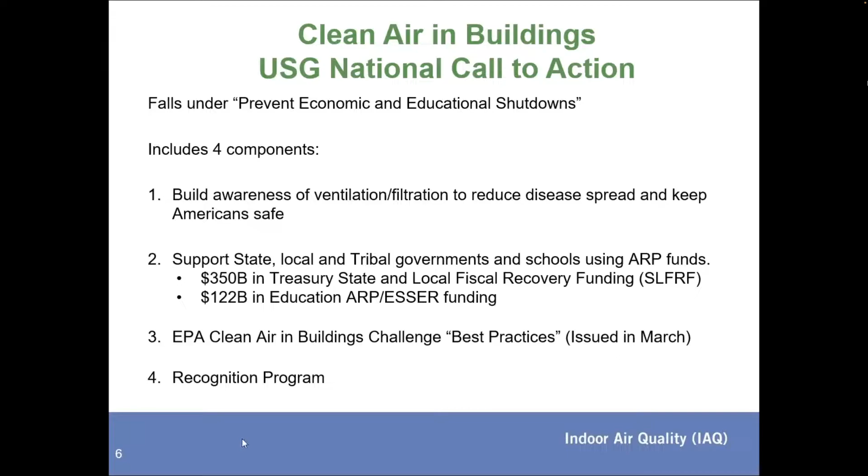At this time, I'd like to introduce Dr. Bill Bahnfleth, or William. He is a professor of architectural engineering at the Pennsylvania State University in University Park, Pennsylvania. He is a fellow of ASHRAE, the American Society of Mechanical Engineers, and the International Society of Indoor Air Quality and Climate. As the chair of the ASHRAE Epidemic Task Force, he has been recognized with a letter of appreciation from the U.S. EPA and the ASHRAE Presidential Certificate of Honor. At this time, I want to hand it over to Bill, who is going to tell us about ASHRAE IAQ standards before, during, and after COVID.

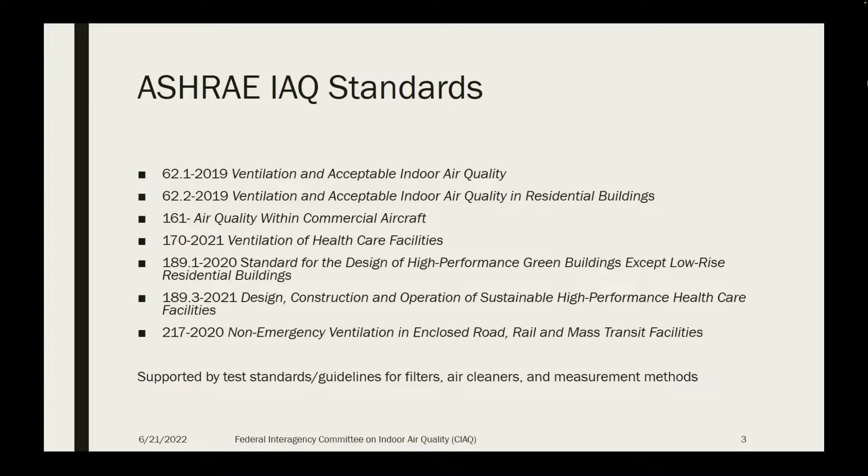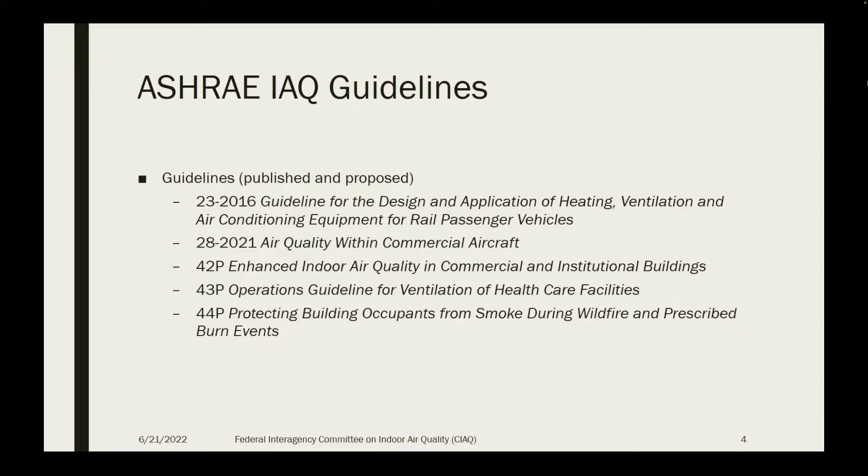One on enhanced indoor air quality that I think is almost ready to go. Another one for healthcare facility ventilation, and a third on protecting building occupants from wildfire smoke. So there's a large body of standard and guideline information put together by ASHRAE's committees that can be accessed to address our common goals here. It is the best example and the most important example of these.

I'd like to go through what's in ASHRAE Standard 62.1, Ventilation and Acceptable Indoor Air Quality. It used to be Ventilation for Acceptable Indoor Air Quality, but the name was tweaked fairly recently. I think you'll agree when you get to the end of my summary that there's really a lot here that is exactly what we need to move forward, but I'll point out that one of the big issues we have is how much of what's in a standard actually gets into the building code and becomes mandatory for someone who's designing or operating a building. So we'll come back to that point a little bit later.

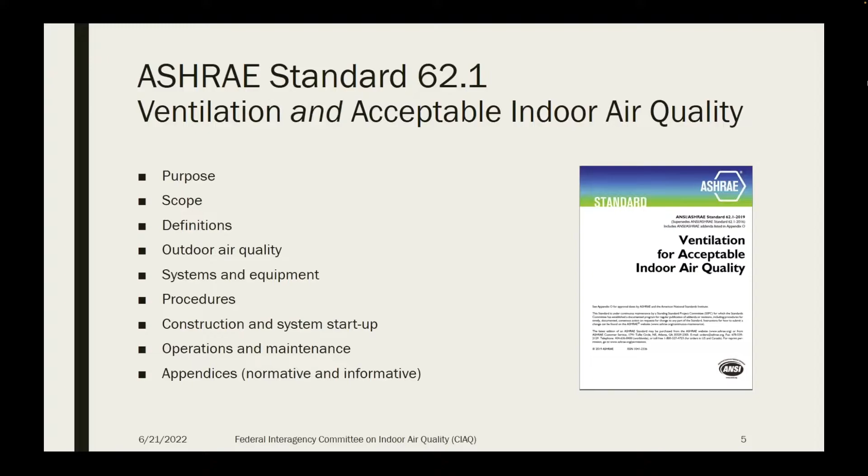You can see the main sections of 62.1 listed there on the left, purpose, scope, definitions, and others that we'll go through. And I'll touch on all of these things except for the appendices. So the purpose of the standard is to specify ventilation rates and other measures that will give us air quality that's acceptable to occupants and that will minimize adverse health effects. I'm going to pick on this point of minimizing adverse health effects as falling short of actually promoting health, and that's one of the areas that I think we can improve on.

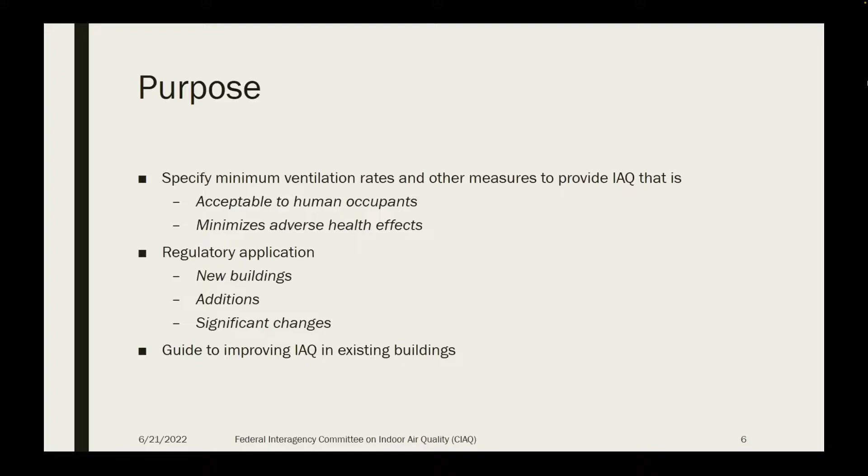It's intended for regulatory application, primarily to new buildings, but also to additions to buildings that are large enough to require it, and also if there are significant changes in the operation of the building. It should be applied to existing buildings. And it also is intended to be a guide to improving indoor air quality in existing buildings, even if it's not mandatory.

The scope is occupied spaces in buildings except non-transient occupancy dwelling units. In other words, residential buildings that are covered by Standard 62.2. And it covers comprehensively ventilation and air cleaning system design, installation, commissioning, operation, and maintenance.

And there are also requirements that we'll see for some contaminants, a limited number of contaminants and their sources, including outdoor air, construction, and others. But one thing that's not covered in the standard is pathogens. What's excluded from the scope is smoking, which was removed a long time ago because it was concluded that we couldn't specify ventilation quantities for smoking that met the requirements of the purpose of the standard.

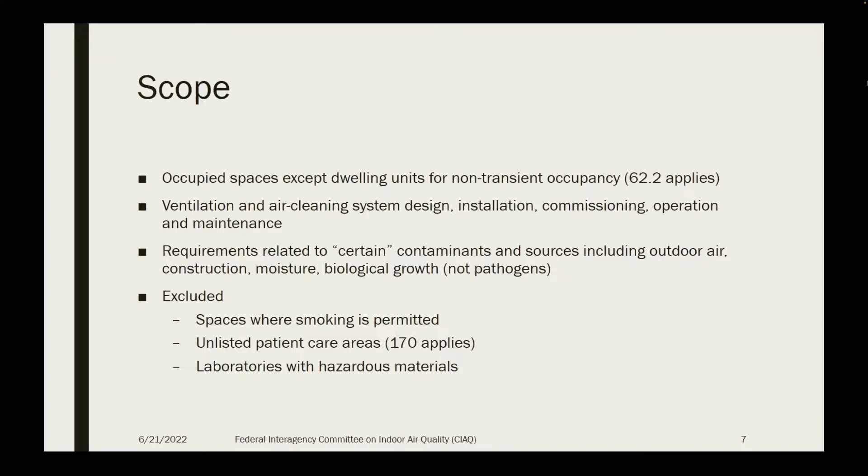It also doesn't apply to any patient care areas that aren't listed. Those fall under ASHRAE Standard 170 for healthcare, and likewise laboratories with hazardous materials. But it does cover really the majority of non-residential buildings and spaces in those buildings.

From the definitions, I only want to pull out one thing, and that is this critical definition of acceptable indoor air quality, which ties back to the stated purpose. No known contaminants at harmful concentrations as determined by cognizant authorities, and a substantial majority of the people exposed do not express dissatisfaction. So I call this a safety and satisfaction criterion because from the health point of view, it only strives to prevent adverse health effects. It doesn't promote what we would call today health and well-being.

And you may be familiar with the World Health Organization's definition of health, which starts out with the statement that it's not merely the absence of disease. So we have a standard that tries to avoid those adverse health effects and to ventilate at levels that don't cause occupant dissatisfaction. And you may have seen the data on the right, which has been the basis of these standards around the world for a long time, done by Fanger and others on human subjects that can relate the amount of ventilation per sedentary individual to the likely percent dissatisfied.

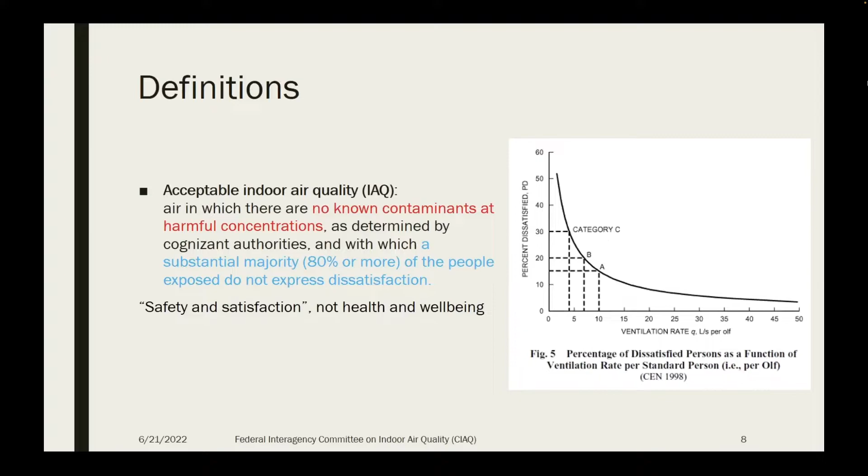So the next section of the standard deals with outdoor air quality. The ventilation standard must presume or specify how we can have outdoor air that's of acceptable quality to remove indoor contaminants. If we have outdoor air that's dirtier than the indoor air, then we may actually be making things worse by using it. So these are requirements for the outdoor air, and they fall into two categories.

The first is regional air quality. So the user of the standard should determine whether regionally the outdoor air is in compliance with the national standards. In the U.S., that would be the National Ambient Air Quality Standards. And if there's non-attainment in some respect, then that can trigger special requirements. And in Standard 62, those relate to particulate matter and ozone.

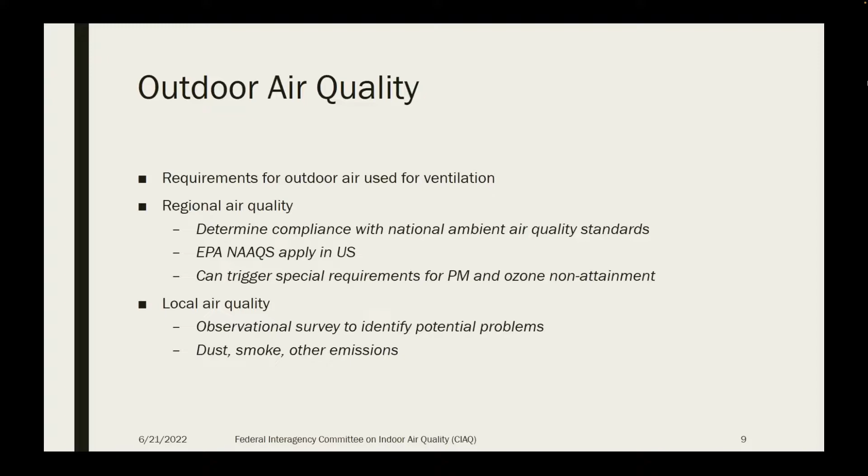And also, the standard says that there should be a local air quality survey, so an observational survey where the building is located to identify potential problems, for example, sources of dust, smoke, or other emissions, which often happens in urban or even in rural agricultural areas.

The next section deals with systems and equipment and the design of systems, and I will not go through all of the things I've pulled out and put on this slide, but I think it's important to note that there is a lot in Standard 62.1 about how you put together a system that is going to be able to deliver good air quality consistently, and this includes things like having a system that can be maintained and balanced, and taking care about where exhausts and outdoor air intakes are located.

With respect to air cleaners, we're now starting to see requirements in the standard, like the one shown here, that air cleaners must be compliant with UL 2998, which essentially means that they produce no ozone. And a related requirement, UV devices can emit no 185 nanometer UVC, which is a wavelength that produces ozone. And there are others as well that I would direct you to the standard to read in detail. This is the sort of thing that doesn't make it into the codes, as we'll note again later.

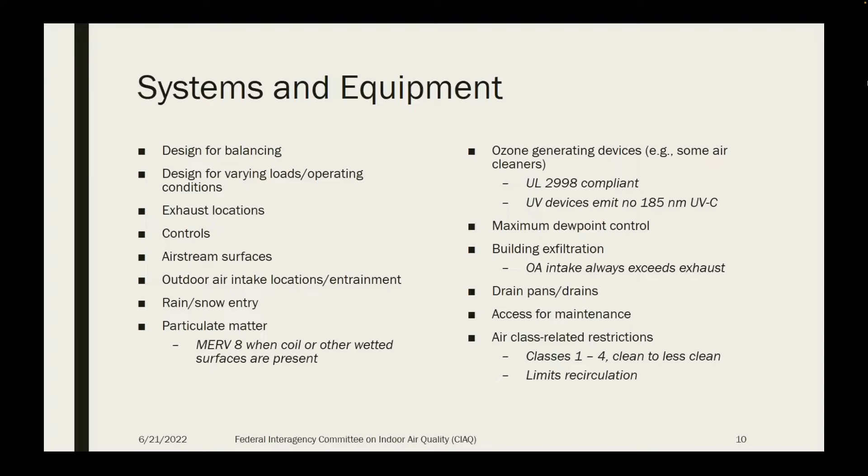Now, the part of the standard that most are familiar with, and it's probably the only part of the standard that many designers are well aware of, is the procedures section. These are the compliance paths by which we determine how much outdoor air has to be brought in to achieve the goals of the standard.

The first procedure is the ventilation rate procedure, or VRP. It's a prescriptive procedure in which outdoor airflow rates are specified based on the space type, on the floor area of the space, and on the number of occupants.

So if a designer has applied this procedure correctly and determined the total outdoor airflow that needs to be brought in, then they've complied prescriptively.

The second procedure is the indoor air quality procedure, which relates to control of specific contaminants to required levels. This part of the standard has just been completely upgraded in a way that I think is very good and an important improvement. In the past, it was left to the user to identify the contaminants of concern and to do mass balance calculations to determine how much outdoor air was needed for control, and they could also apply air cleaners, but there was no requirement for verification of that.

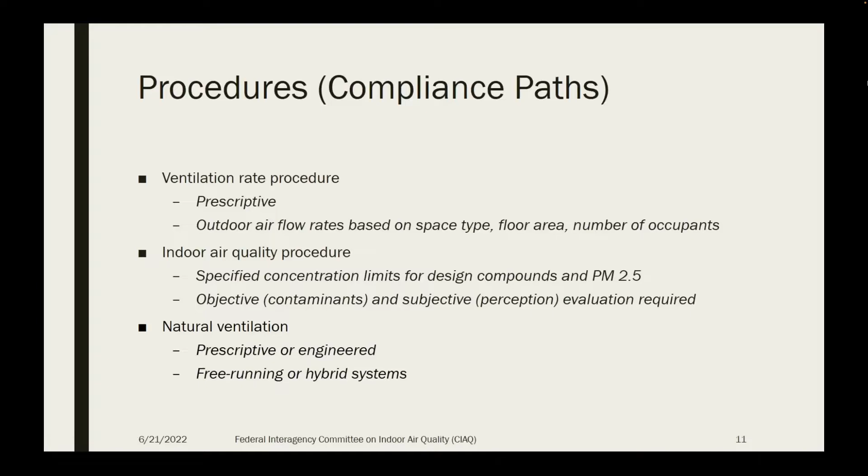So the ventilation rate procedure begins by defining the required breathing zone outdoor airflow. So this is outdoor air that's brought into the part of a space where occupants are and where they will be able to actually benefit from it. The breathing zone is defined as 3 to 72 inches above the floor and more than 2 feet from the walls.

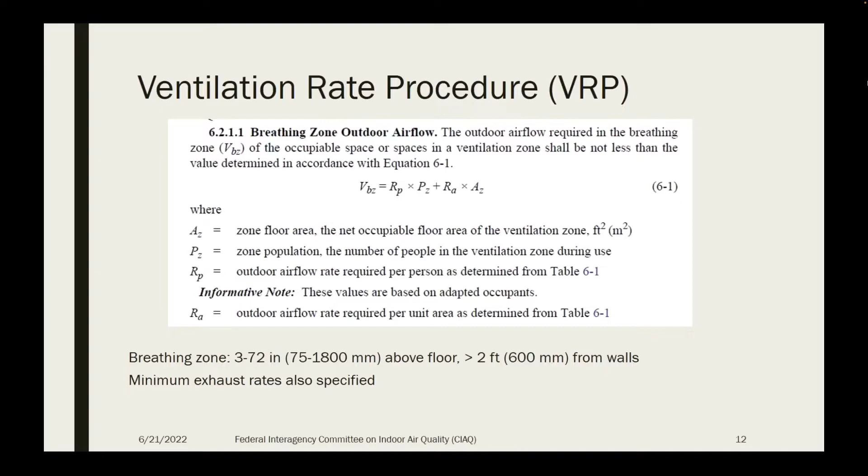And as you can see by the equation here, the breathing zone ventilation rate is the sum of two parts. One is a rate per person multiplied by the number of occupants, and the other is a rate per unit of floor area multiplied by the area. And so those two together become the design minimum breathing zone ventilation rate.

This is an excerpt from the table where the various rates are found. It goes on for several pages, so I just grabbed a little piece of it that shows office buildings. You can see there, hopefully, the office space, for example, has a requirement of 5 CFM per person plus 0.06 CFM per square foot.

The population of a zone can be determined by the designer if there's a chair count or if the architect has given them a number, but in the absence of that, default occupant densities have been provided that can be used to give us typical values. I think with the default occupant density for office space, we wind up with something like 17 CFM per person, but I think it's important to point out here that there is no consistent CFM per person or CFM per square foot across all space types, and that becomes important when we get into discussions like we've had during the pandemic of what should the CO2 concentration be in a space.

To comply with Standard 62, it may be necessary in some cases to have a CO2 concentration that's well under 1,000 parts per million, but there are space types with high occupant densities that may have CO2 concentrations that are around 2,000 parts per million when complying with the standard. So this has been an interesting issue to negotiate in discussing what we should do with ventilation for infection control.

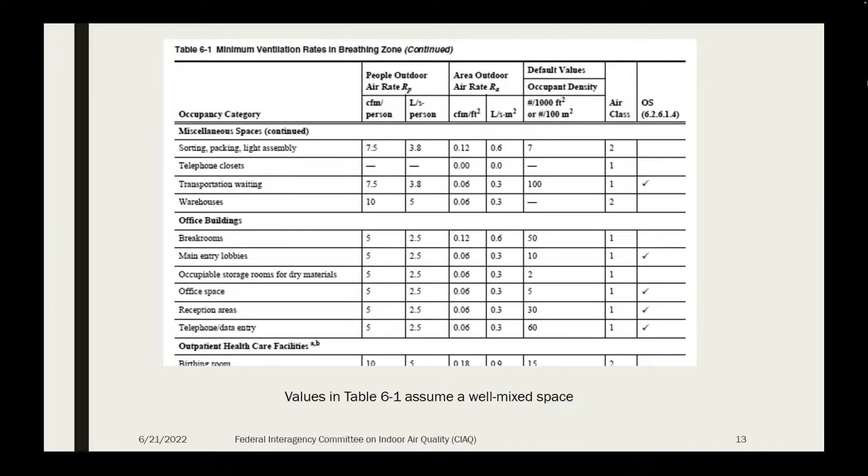Now, to this breathing zone ventilation quantity, we need to make some corrections. It's assumed that the outdoor air that's brought into the breathing zone is thoroughly mixed, some would say well mixed, in that space, so that contaminant concentrations are all averaged out.

And also we can provide outdoor air directly to where an occupant is, personal ventilation. So we need to make corrections for the type of air distribution and also for how well it's performing.

And in addition to that, when we take multiple spaces and connect them together in a system, so we have 10, 20, 100 rooms on an air distribution system, we now have recirculation of air that was in one space that goes back to the others. And so we have differences in the amount of outdoor air required depending on whether we have or don't have recirculation. And I won't go through the details of that in this talk.

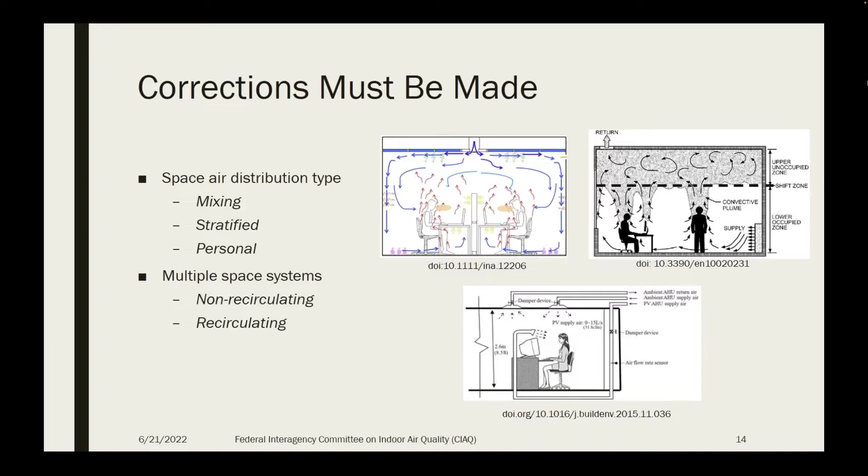The ventilation rate procedure also discusses dynamic or demand control ventilation. Demand control has generally been used for the purpose of saving energy. The reason that we do demand control in most cases is to reduce the amount of outdoor air so that we stay at the level of ventilation that's required by the standard and no more. And that is an interesting thing to realize, because it means that whatever our minimum standard is, we're making sure we never do any better than that if we can avoid it.

So we can reset the outdoor air based on the current occupancy, and in some cases it can actually be shut off when a space is unoccupied and then restarted. The standard is not explicit in saying how demand control can be done, although it does imply that carbon dioxide measurements are acceptable, but it also mentions some criteria that need to be met. I think we can do demand control differently, and we'll come back to that at the end.

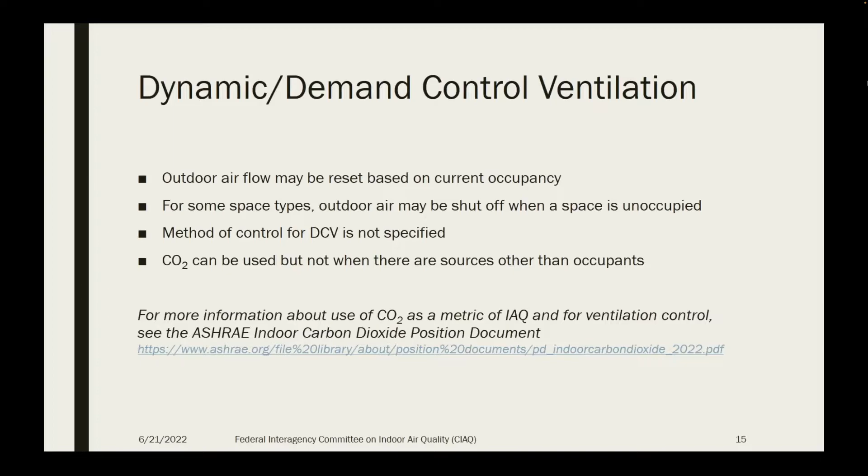ASHRAE has just published within the last few months a position document on indoor carbon dioxide, and it addresses issues of the uses of CO2 in ventilation and for infection risk management, and I would encourage you to take a look at that. If you haven't seen it, it can be downloaded from the ASHRAE website.

So these corrections that we're talking about are in the standard given in the form of zone air distribution effectiveness corrections, and we divide the breathing zone outdoor air rate by the air distribution effectiveness. So if the value of Ez is less than 1, that means that we have to exceed the amount of outdoor air that was given in the original table 6.1 that we looked at. And if it's a larger value, that means you've got better than well-mixed ventilation effectiveness, and we can reduce it.

And the 3 categories of air distribution that we talked about, mixing, stratified, and personalized, are now all covered here. And you notice there's quite a range in these Ez coefficients. 1.0 would be perfect mixing, but for mixing systems, if they're performing poorly, if they stratify for some reason, or if we have short circuiting, then Ez could be as small as 0.5. And for a well-performing stratified or personalized ventilation system, the value of Ez could be as large as 1.5. So that further changes the picture as far as how much outdoor air we really need.

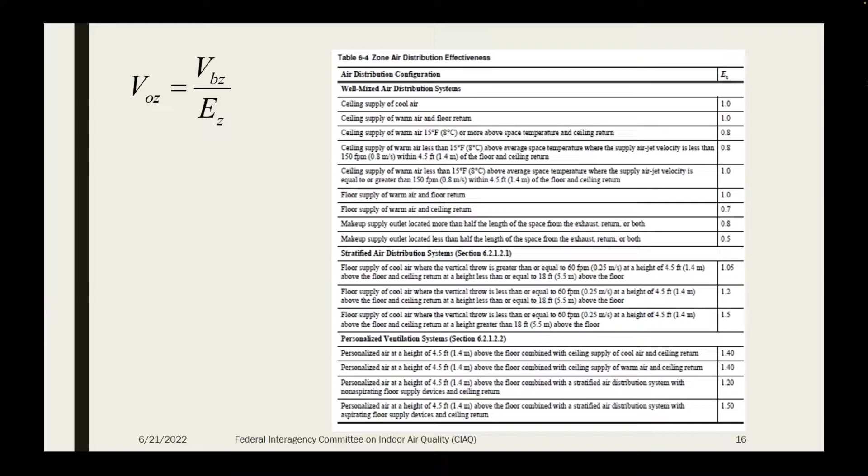And this really kind of encapsulates a very important issue, which is how well air is distributed in spaces, and that's something that lies outside the standard, but it's an important topic for the future to try to achieve good air distribution. We've seen that to be a problem in many cases during the pandemic.

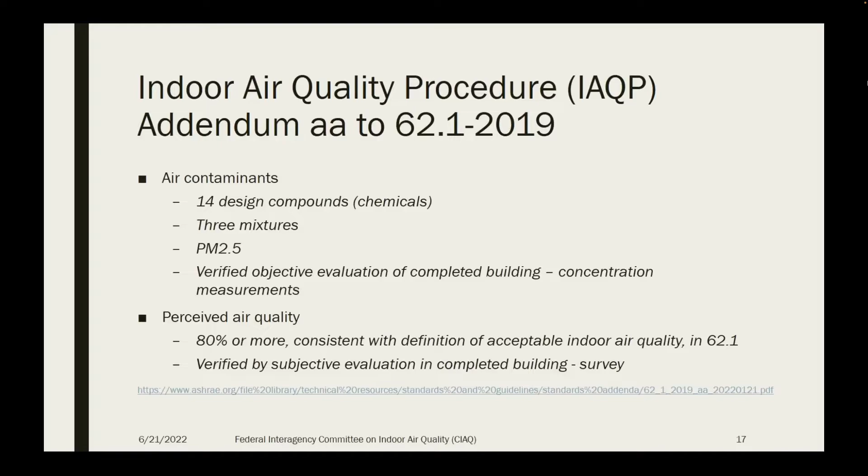So I mentioned the indoor air quality procedure before, and now we'll look at it in a little detail. There are 14 design compounds and 3 mixtures of those compounds, and also PM2.5 that are listed. And as I mentioned, we need to have objective evaluation that those requirements are met. For perceived air quality, 80% or more of the occupants by survey need to be determined to be not dissatisfied with air quality. You can get the addendum from the ASHRAE website at the URL shown here. Hopefully my slides can be made available to folks afterwards.

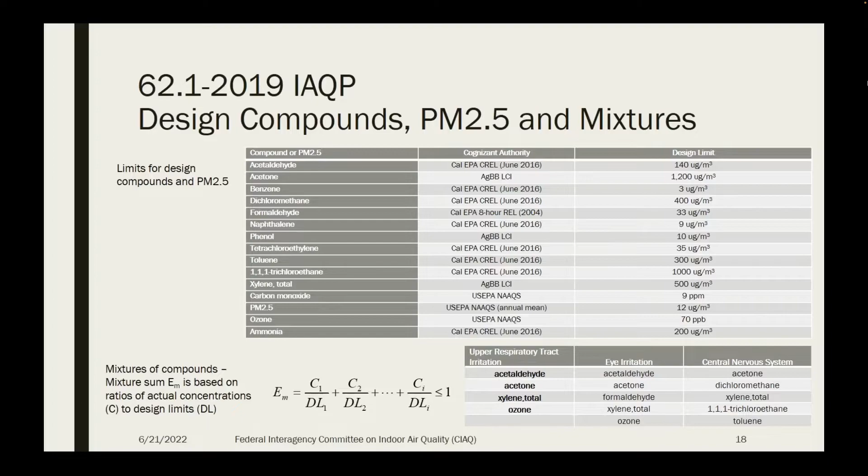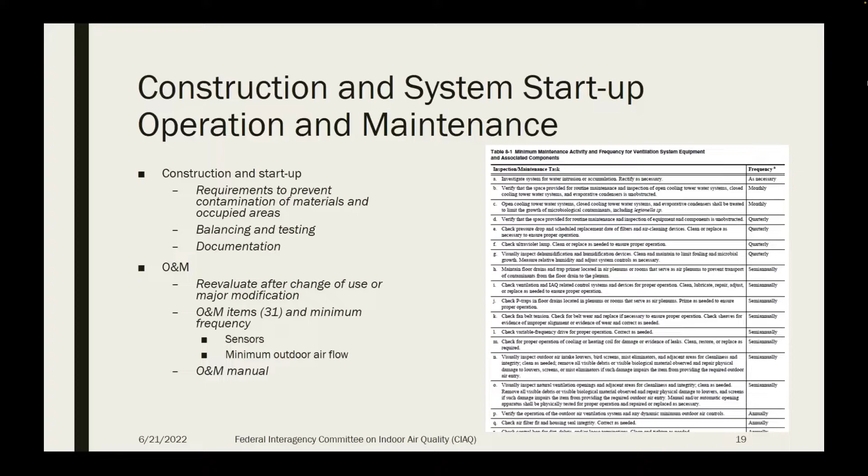Many of us had learned during the pandemic, when surveys were done of portfolios of buildings, that many of them were not meeting their minimum requirements, and in fact, many of them were found not to be able to meet them. So this is a really important part of the standard. And O&M documentation is also mentioned here. So that's what I want to summarize at a high level, what's in 62.1.

Now to wrap this part up, a few thoughts about the relationship of standard 62.1 to the building codes. I think many believe that standard 62.1 is the building code, but actually standards are mandatory only to the extent that they make it into the code, and that's a different step, and it can be a pretty fine filter for what's in a standard. So few standards are adopted in their entirety as building codes, and in some cases only a little bit makes it there. The International Code Council is certainly the predominant writer of model codes in the U.S.

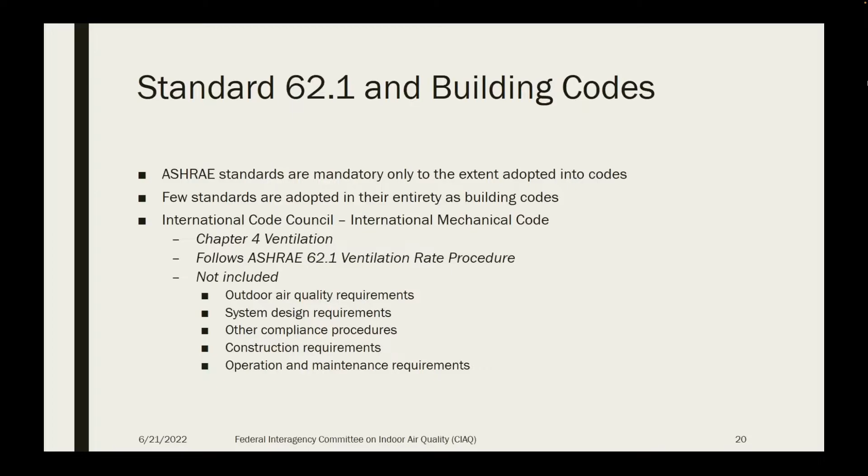And the International Mechanical Code covers in chapter 4 ventilation, and that section follows the ventilation rate procedure from whatever version of 62.1 was in force when the particular version of the model code was updated. So it doesn't really cover the outdoor air quality requirements, the system design requirements, the other compliance procedures like the IAQP, the construction requirements, or the O&M requirements that we just looked at. So it sets aside a lot of things that would be really important for designing the building well, and also for maintaining and operating it effectively over its lifetime.

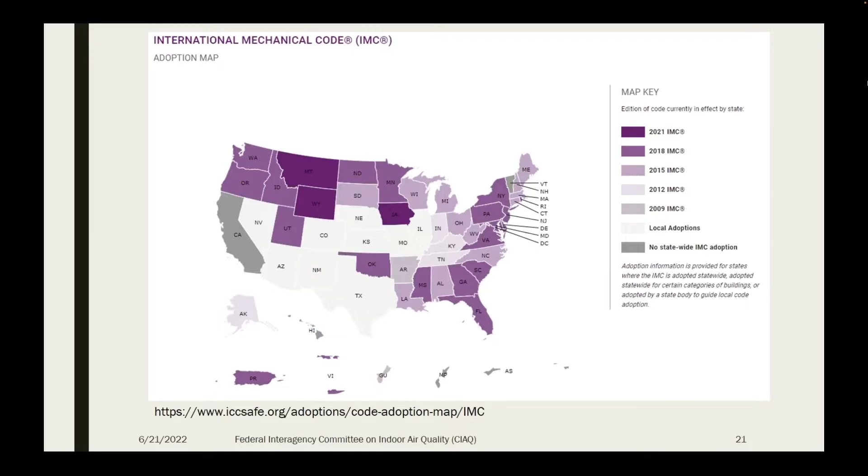This map that comes from the ICC website shows the coverage of the U.S. by the International Mechanical Code, and somewhat like the coverage with energy standards and their compliance with ASHRAE Standard 90.1, we see that we've got versions of the IMC all the way from 2009 through 2021 that are adopted in different states. So this is an important thing to look at, is how do we get the good things that are in some of the most important standards into the code so that they'll actually be used.

So now we'll move on to what ASHRAE has done during the pandemic, and it certainly has been a big job and a very rewarding job for me to work with so many subject matter experts to put together what the Epidemic Task Force has done.

I'm going to summarize all of that by going through a one-page list of recommendations that we call the core recommendations that were published early in 2021. The reason that we did that was that we wanted to have a concise list of our main principles that we could use to keep everyone on this big task force coordinated, and also to make it clear to the public and the users of the guidance what ASHRAE was recommending at a current particular point in time, and communicate the basics of airborne risk reduction.

It really has been a big problem over the 2 years of the pandemic to make it clear in an ongoing way what ASHRAE has recommended. I think everyone, not just ASHRAE, early on was very conservative and proposed just about anything that seemed like it might help. But after only a few months, we were making significant revisions to the initial guidance based on considerations of technical feasibility and energy use and operating costs, and also reevaluating how much benefit there might be from some of the things that were recommended.

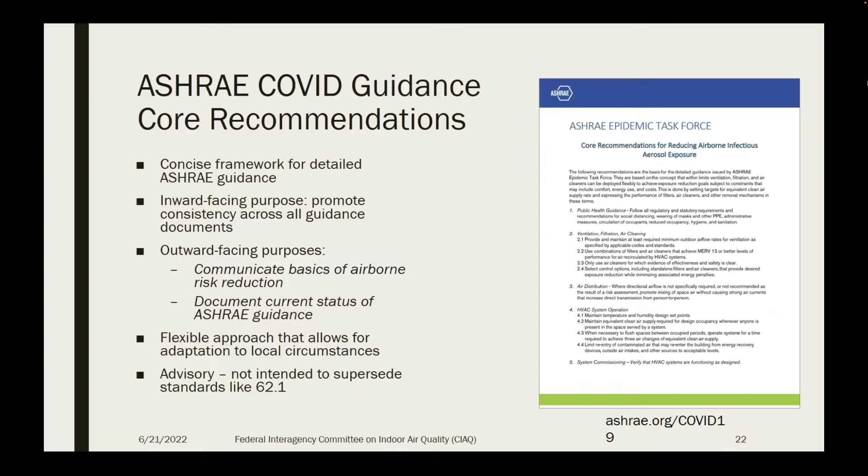And what I think we came to eventually, and this is really the current state of the guidance, is recommendations that support a flexible approach to risk mitigation that can be adapted to just about any building and situation. And again, these are advisory. They don't supersede standards like 62.1, and we had to give a lot of assurances to the standards folks that we were not writing new regulations that everyone would have to follow after the pandemic, although we hope that what we have done will certainly inform what's done in the future.

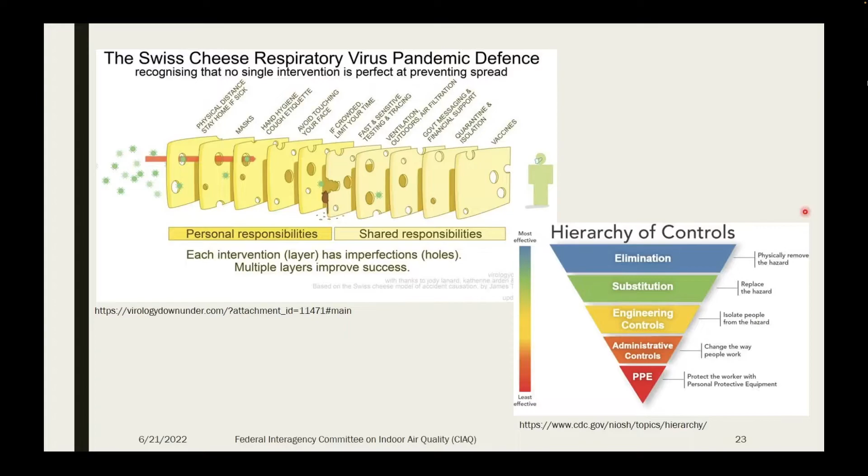So the first thing that I want to highlight here is the notion that what we can do with building systems, with building science solutions, is just one slice in the stack of slices of Swiss cheese, if you prefer that model of risk management. And it's just one layer in the hierarchy of controls that you may have been more familiar with previously from NIOSH, and not the most effective layer. Elimination, substitution are clearly always the best way to deal with a hazard.

So we start the recommendations by saying follow public health guidance. And of course, that can be difficult as it goes back and forth under the influence of various forces, but by and large, public health guidance has been on target in terms of things that we should do. And so we encourage that those measures, like using masks when recommended, social distancing when recommended, being vaccinated when vaccines are available, are really the first line of defense, and will be complemented and supplemented by what we can do in buildings.

So the meat of the recommendations is probably the ventilation, filtration, and air cleaning section. We start with outdoor air. The recommendation at this point is to provide and maintain at least the required minimum outdoor airflow rates per code and standard. The reason that's important is that early on there were a lot of sources recommending maximizing outdoor air. Whatever your system can provide, if you can go into full economizer mode, then do it, and that's going to be better. We don't think that that's really the right approach anymore.

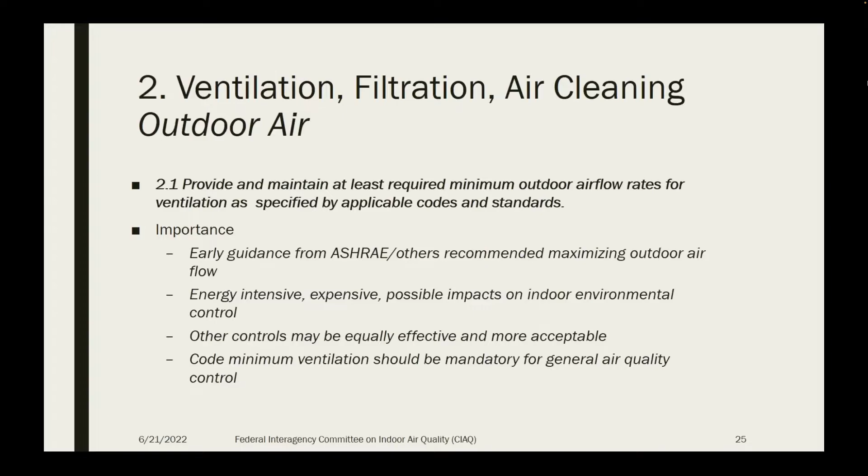For filtration, we've recommended to use combinations of filters and air cleaners that achieve MERV 13 or better levels of performance for recirculated air. Filtering outdoor air doesn't help us with infection control because the pathogens have their sources indoors. So this applies to recirculated air. The ASHRAE Standard 62.1 only requires a MERV 8 filter in an HVAC system when there is a wetted coil or other wetted airstream surfaces.

So it's actually a requirement that's related to the potential for particulate fouling of equipment, and it's not tied to exposure to particulate matter of occupants. And when we look at the performance of MERV 8 filters in terms of particle size removal, they're not very good for particles that are in the size range that we're concerned about.

So the importance of this recommendation is that standard filters don't do much for infectious aerosols. Also, by saying that MERV 13 is okay, we're saying you don't need to go to HEPA, which was something that was suggested in a number of cases early on. You may remember that at one point the state of New York was thinking about requiring HEPA filters in malls, which was really something that was not feasible at all.

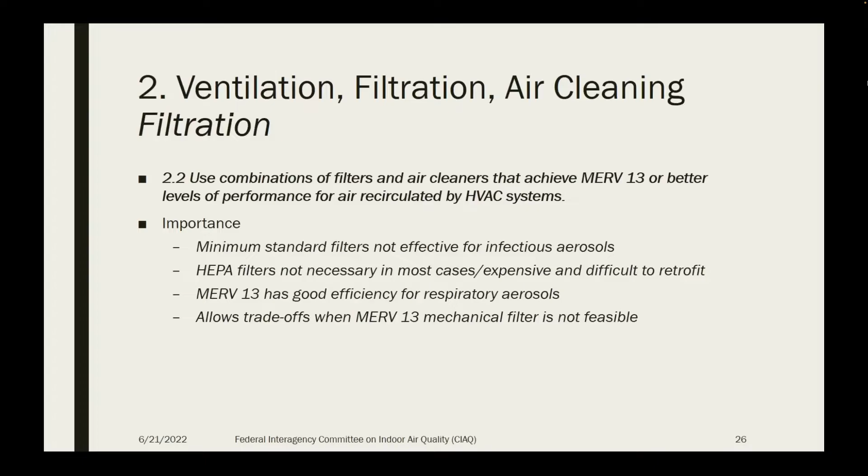MERV 13 has good efficiency for respiratory aerosols, and the combinations of filters and air cleaners language here allows for trade-offs with other technologies if a MERV 13 is not strictly feasible. So 2 filters in series with the efficiency of a MERV 13 or a lower efficiency filter and some other type of air cleaner could also meet this requirement.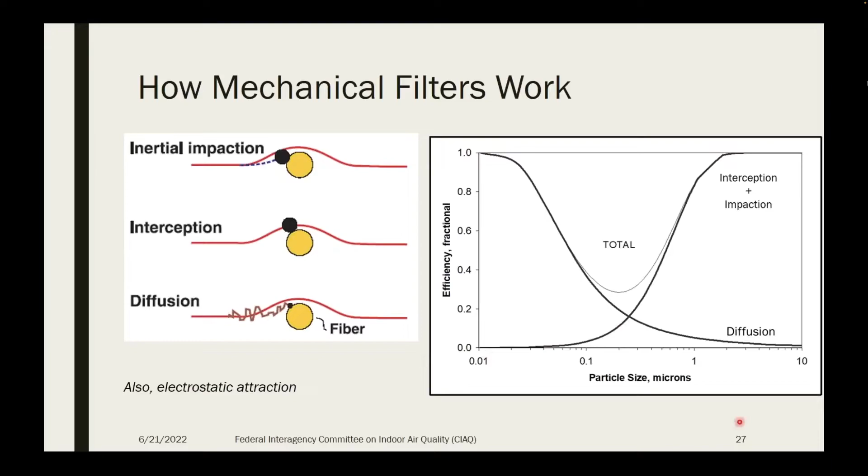I think that filter performance was frequently misrepresented in popular accounts as always getting worse as the particle sizes get smaller. And we've tried hard to overcome that misconception. So filters are rated by another ASHRAE standard, 52.2, and that standard only tests from 0.3 microns up, and it rates filters in 3 different size ranges, and the minimum efficiency in each size range from multiple tests is used to determine the rating. So there are numbers from 1 to 16, and the larger the MERV number gets, the more efficient the filter is and the better it does with fine particles.

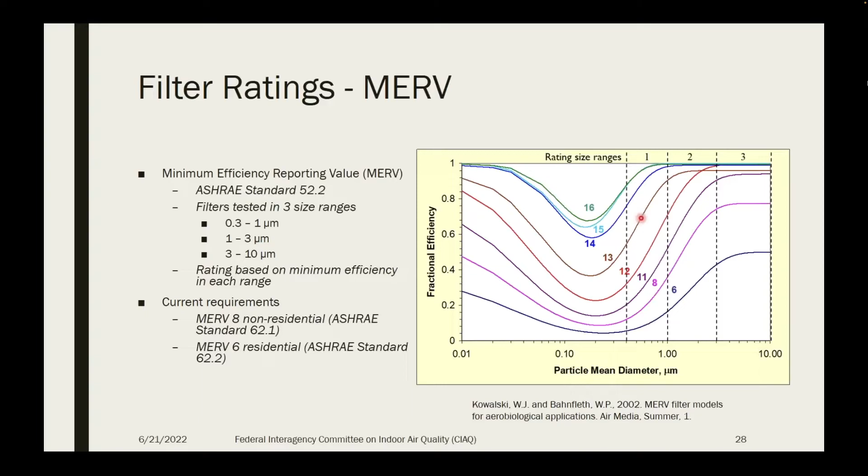I've already mentioned that in 62.1, MERV 8 is the minimum requirement now. In ASHRAE 62.2 for residential buildings, it's only MERV 6. So we're at a pretty low level. You can see from the representative filter efficiency curves here that down here between 0.3 and 1 microns, MERV 6 and 8 aren't very good, and big improvement if you go up to MERV 13.

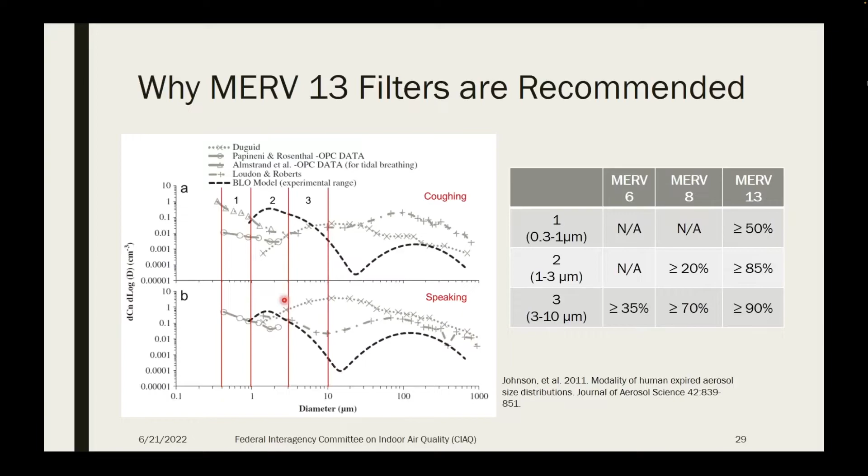So that's important because if we look at respiratory aerosol size distribution, there are a lot of particles down in the PM 2.5 range, and the viruses themselves are in the fractional micrometer range. So I've overlaid here the filter rating ranges on respiratory aerosol spectrum, and we see that if we have filters that are low efficiency in ranges 1 and 2, which MERV 6 and 8 are, we don't do very well. MERV 13 is 50% efficient or better in range 1 and 85% or better in range 2, ergo the recommendation to use higher efficiency. You may be aware that California has already implemented a requirement for MERV 13 minimum for all buildings, residential and non-residential.

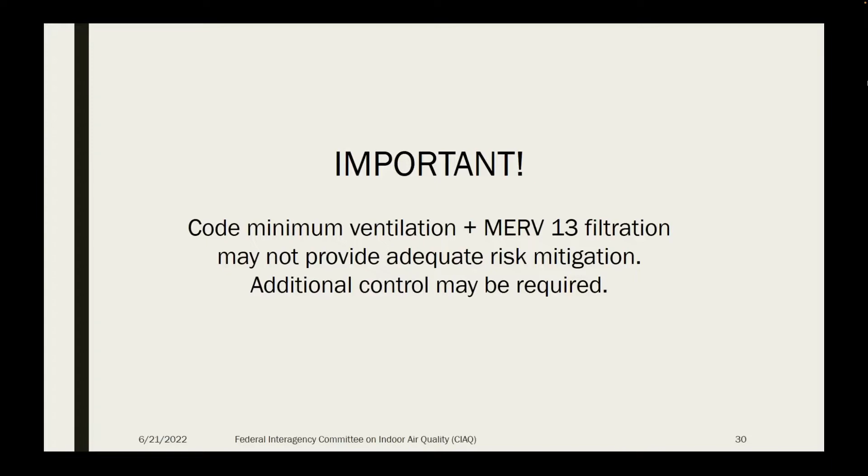All right, so now to this important point that code minimum plus MERV 13 may not provide adequate risk mitigation. It's been a problem throughout the pandemic to say exactly how much is needed. That rests on risk assessment that is difficult to do accurately, but it's clear that in some cases additional controls are required to meet the goals that we might have for making spaces safer. So how much uncontaminated air do we need? There are many opinions about this.

WHO has published a roadmap on ventilation for COVID in which they recommend 60 liters per second per person for healthcare. That's 127 CFM per person, which is far beyond what's in 62.1, but not inconsistent with the total air change rates in some healthcare facilities. Alternatively, if you can't do that, 6 air changes per hour, which is probably quite a bit less, but similar to the lower range of air change rates that we would find in ASHRAE Standard 170.

For non-healthcare facilities, 10 liters per second per person has been recommended as a minimum. That's 21 CFM per person, and that's not actually a lot more than we find in many standard 62.1 compliant spaces, although it is higher. We don't have recommendations in 62.1, but if we go back to the 1914 ASHVE recommendations, and ASHVE was a predecessor organization to ASHRAE, they were recommending 30 CFM per person at that time, even before the 1918 influenza pandemic, and that's 14 liters per second per person. And we also have various parties recommending 4 to 6 air changes per hour, which, as far as I can tell, comes primarily from analogy to ASHRAE Standard 170, even though it covers an entirely different type of facility.

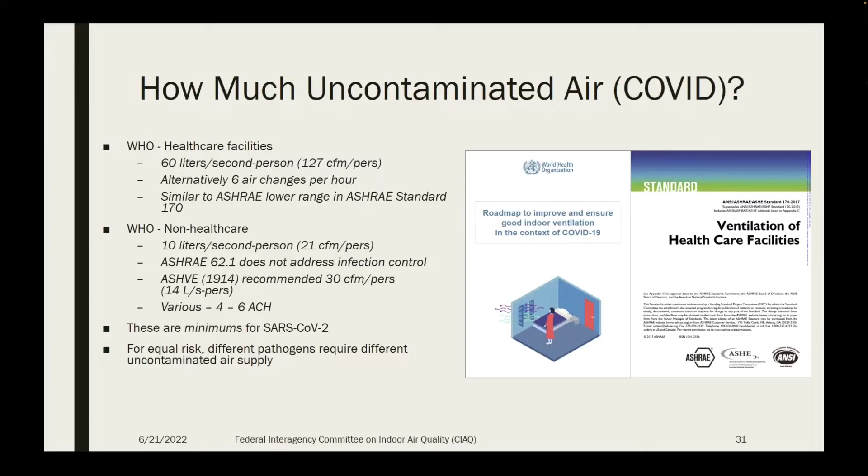And those should be considered minimums. Now, if we change the pathogen in the future, and we will have other airborne infectious diseases, then the amount of uncontaminated air it takes to dilute to get the same level of risk is going to change, and that's one of the problems we need to deal with in the future. We can't base all of our future standards on what happened with one pathogen, even though it was a bad one. A little more detail on the 10 liter per second per person idea.

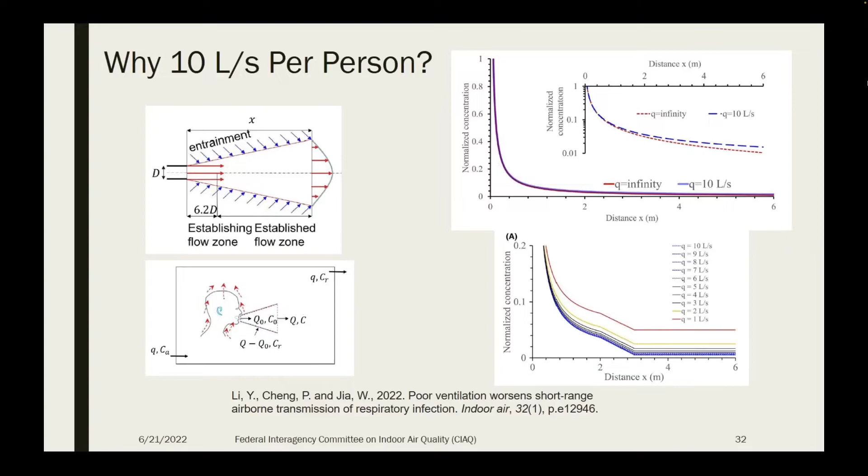Yuguo Li, who's been working in infection control since the original SARS outbreak early in this century, has done analysis that suggests that if we can provide 10 liters per second per person, we can dilute the ambient air in a space to a concentration that's getting reasonably close to what it would be in outdoor air, and in the process also reducing the risk of short-range transmission. So this is one researcher's recommendation that's backed up by some good analysis, but it's not one that everyone agrees with, and I've seen much higher recommendations made as far as what is necessary in different environments.

So now let's move on to the air cleaner part of this section of recommendations. Our simple, maybe cryptic recommendation is only use air cleaners for which evidence of effectiveness and safety is clear. Why is that? Well, while there are many air cleaners available in the market, there are many for which the manufacturer's claims are not well established by their own testing or by independent testing or by peer-reviewed research.

ASHRAE believes that in addition to mechanical filtration, germicidal ultraviolet is well established, and is not confident enough of where we are with other air cleaner types to give them the same kind of approval, though ASHRAE does not recommend specific technologies or products. So at this point, the user who wants to use some of these other air cleaner types needs to study what's available and decide whether they believe that that is persuasive.

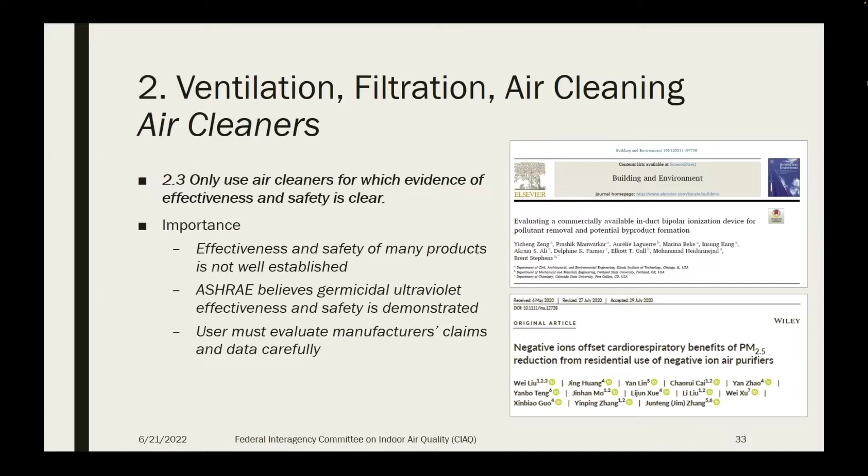We've seen mostly discouraging publications in the last 2 years when air cleaners have been tested. Not all, but a lot of it. And I've shown 2 examples of articles that have produced less than compelling arguments for the use of reactive species air cleaners.

Now, one problem that we have with a lot of these air cleaners that are being promoted is that they put chemicals, disinfectants into the air, and so they don't behave like a filter. We don't have a single pass efficiency that we can assign to them, and so they're generally tested by doing pull-down tests. And if you wait long enough in a pull-down test, the concentration will eventually go to 0. So 99.9% inactivation over 3 hours may sound good, but it might have been 90% if the technology was turned off.

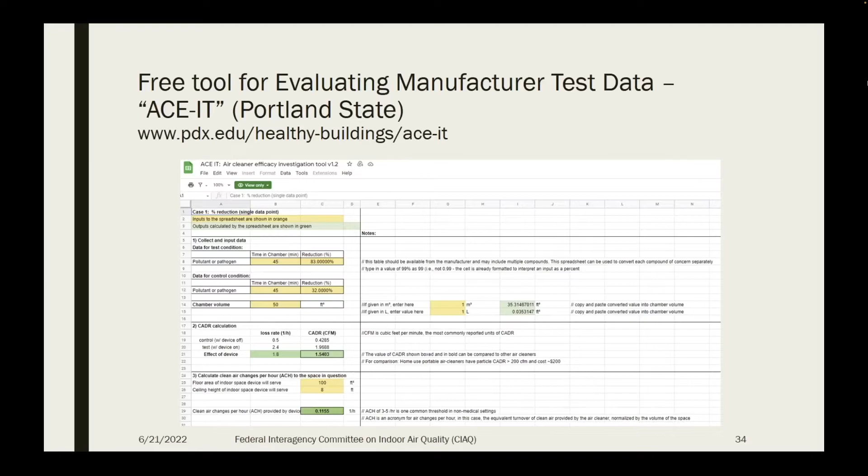Germicidal ultraviolet, the technology that has the best evidence basis behind it, damages the DNA or RNA of microorganisms when the most common wavelength is used, and there are other emerging technologies that may primarily damage proteins in the outer shells of viruses and bacteria, but the technology overall has been studied and applied for more than 100 years. It was used for operating room disinfection in the 1930s and also tested in school classrooms in the 1930s, and is approved for tuberculosis prevention by the CDC.

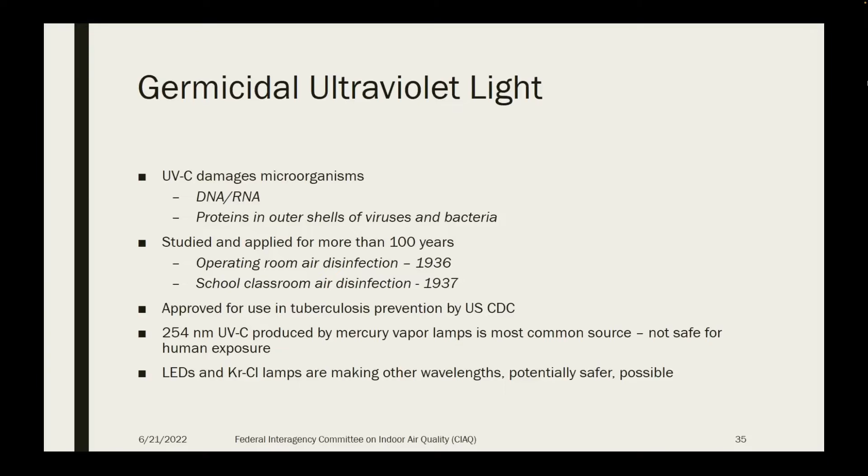The main source of germicidal UV is mercury vapor lamps, which are similar to fluorescent lamps, and they produce 254 nanometer UVC, which is very effective but not safe for direct human exposure. So there are some safety issues with applying it. LEDs and other types of sources like krypton chloride excimer lamps are making it possible to consider other wavelengths, and you've probably heard about far UVC that perhaps holds the potential of being much safer for use in occupied spaces.

Germicidal UV can be applied that way by putting 254 nanometer fixtures above the occupied zone to create a disinfection zone. In terms of effective air change rates, 20, 30, even higher are achievable with this kind of system when there's good air motion in the space.

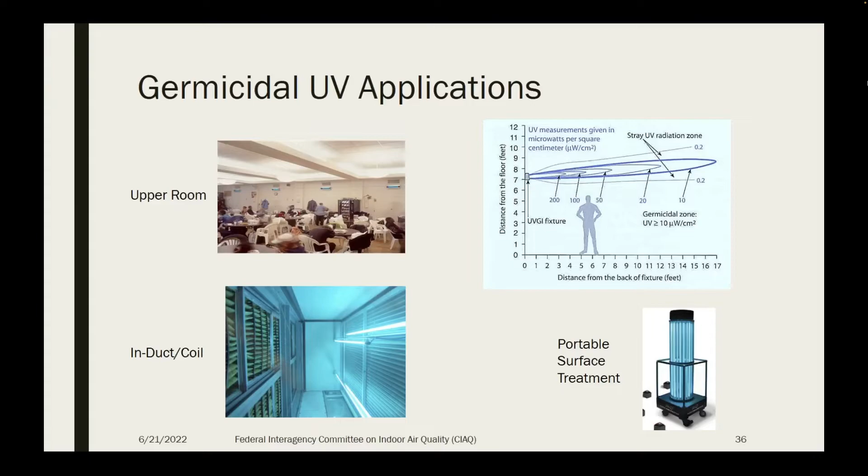They can also be put inside of an air handling unit and do airstream disinfection. Not as effective from that point of view, but it also keeps cooling coils and other surfaces clean. And portable UV for disinfecting contaminated spaces is also a widely used implementation of that technology. So as I said, it's been around for a long time.

Wells and Wilder did studies in schools in the Philadelphia area in the 1930s, and here's an example of an upper room fixture in a classroom at the Germantown Friends School, and on the right the comparison between infections in the UV-treated classrooms in that school and the control classrooms. These are the same vertical scale, and you can see that at least in this study, there was a very significant effect.

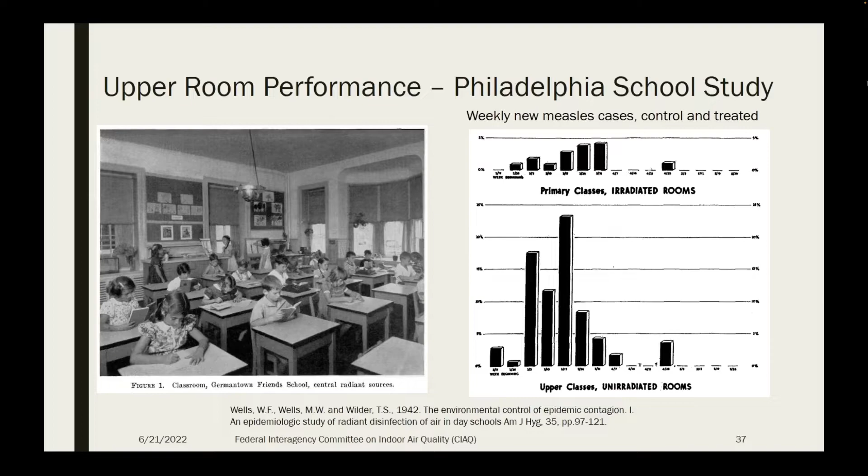So as I said, different wavelengths are being explored, and a whole range of wavelengths work, at least within the UVC band. The figure on the left here from this paper by Ma et al. shows everything from 222 nanometer far UV made by krypton chloride excimer lamps to 254 nanometer from mercury vapor lamp source to 280 from an LED, and they're all capable of achieving 3 logs of reduction, although in this case it appears that the far UV was the most effective of all of those that were tested.

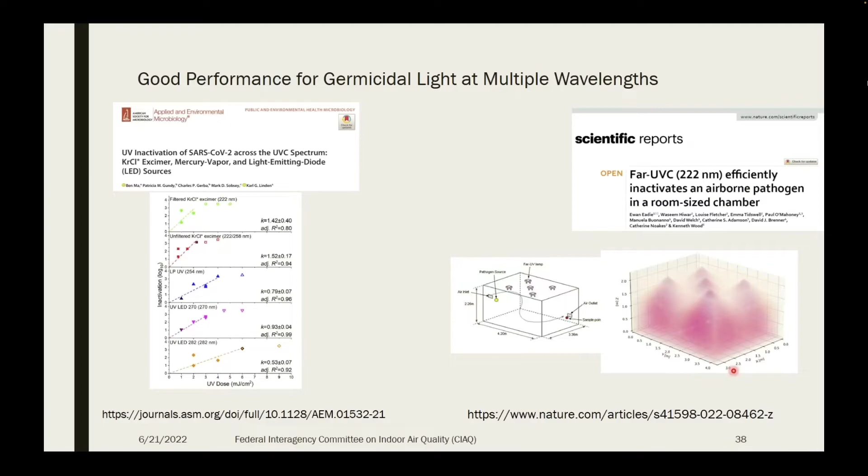And there have been some chamber room size tests in recent times that have also shown that this technology can be effective in a somewhat realistic laboratory application. So those are the technologies we can add to ventilation and mechanical filtration.

The next recommendation is that we should combine those various controls to achieve our risk mitigation targets while minimizing energy penalties, and I suppose we could add here minimizing the overall cost to the owner. This, I think, is one of the most important things that's come out of the development of ASHRAE's recommendations, is that we look more broadly at different types of controls and combine them using an equivalent clean air delivery rate approach. This is what facilitates trade-offs, and it also allows us to recommend the overall control requirements in a simple way. What's the equivalent clean air delivery required, and then we can meet that by using different technologies.

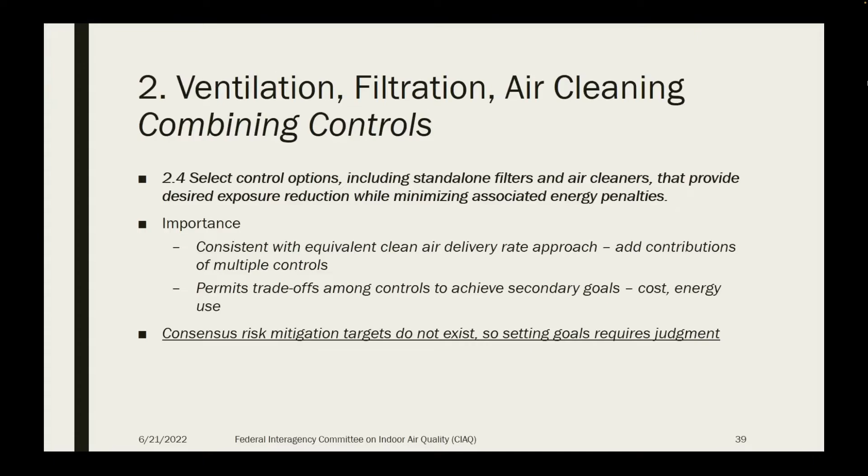But I have to emphasize here that, as I noted when we talked about how much outdoor air is needed, there really isn't consensus on what these targets should be at the moment, and many are calculating their own or appealing to various authorities for them. So how do we do that? Well, we have dose response models for infection.

The Wells-Riley one is the most used, maybe not the most accurate, but it's been well used during the pandemic and relates the source strength, the number of infectors, and the rate at which they're producing infectious doses, and the uptake by occupants, their breathing rate and time of exposure. So this is the dose, and the dilution, the uncontaminated airflow delivery, and that gives us an estimate of the risk of infection.

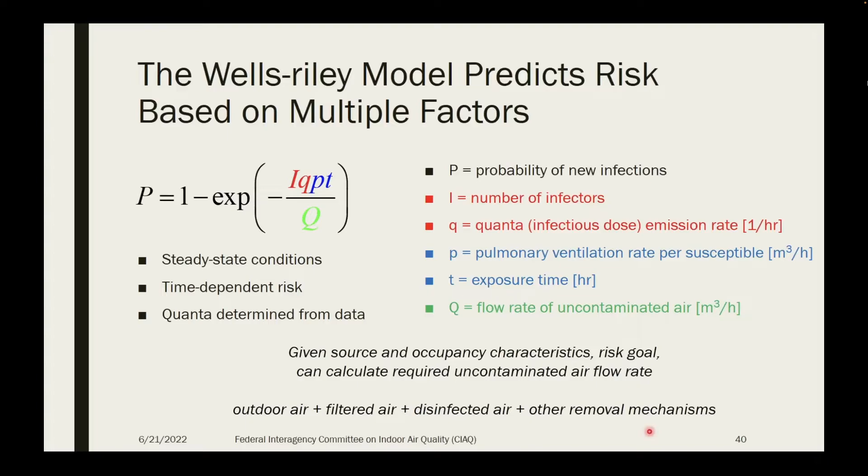So we can take this equation and we can substitute for uncontaminated air in the denominator here multiple terms that relate to different controls, and so we can have a Q that's an equivalent Q that combines outdoor air, filtered air, disinfected air, and even other removal mechanisms. We can take credit here for the effect of humidity and increasing an inactivation rate, or deposition of particles, for example. But we have to keep in mind that this is all fairly uncertain.

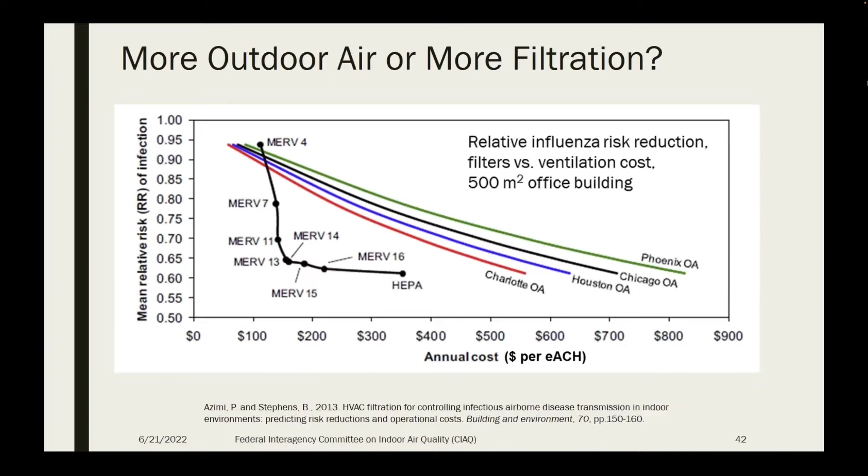And there's an additional reason to think about higher filter efficiencies. This is the collateral benefits of improving indoor air quality that I think we need to emphasize. This study done by Montgomery et al. looked at the annual morbidity and mortality benefits of increasing filter efficiency. So they looked at MERV filters from 6, which was then the 62.1 minimum, all the way up to 16. And for different outdoor air PM profiles, estimated from existing models, the morbidity and mortality costs.

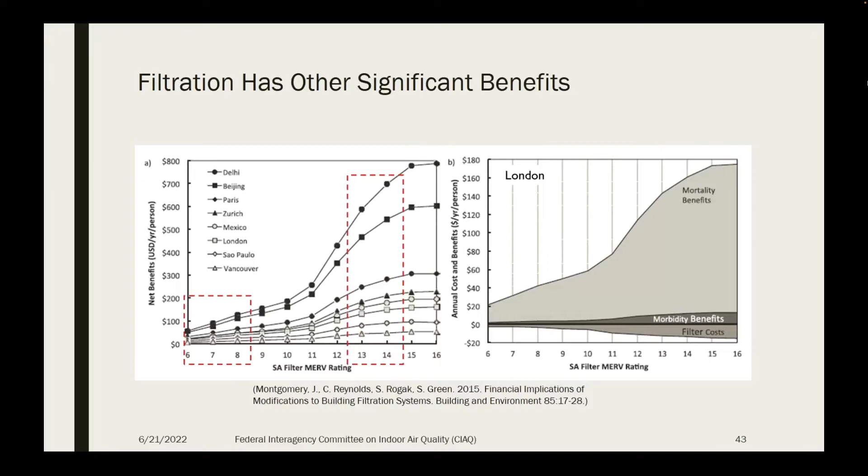And you can see that we get maybe about a factor of 4 increase in going from a MERV 6 or 8 to a MERV 13 or 14. The effect is very large if you're looking at a location with dirty air like Delhi or Beijing. But even if we pick locations that are representative of major cities in Europe or the US, we're still getting a significant benefit from doing this. And this economic benefit is something we have to keep in front of decision makers when we are recommending that we perhaps invest more in indoor air quality.

All right, so we'll move on now to air distribution, which is the closely coupled issue related to ventilation. Ventilation air is only helpful if we get it to the right place effectively. So that's one aspect of air distribution. The other is that air currents can create risk in certain situations. So we looked at a lot of literature on what is effective for infection risk prevention, and somewhat surprisingly found that it wasn't the same types of air distribution that we normally think of as leading to good indoor air quality. In other words, the stratified systems that have been heavily promoted over recent times.

So our recommendation was that unless there's a specific reason to use directional airflow that comes out of a risk assessment or for some other reason, mixing without strong air currents may be the best solution. Of course, we were also thinking here that it would be hard to make air distribution revisions to existing buildings in a short period of time. So this I think of as being one of the most short-term of our recommendations. For existing buildings, if they're mixing well, then that's probably okay.

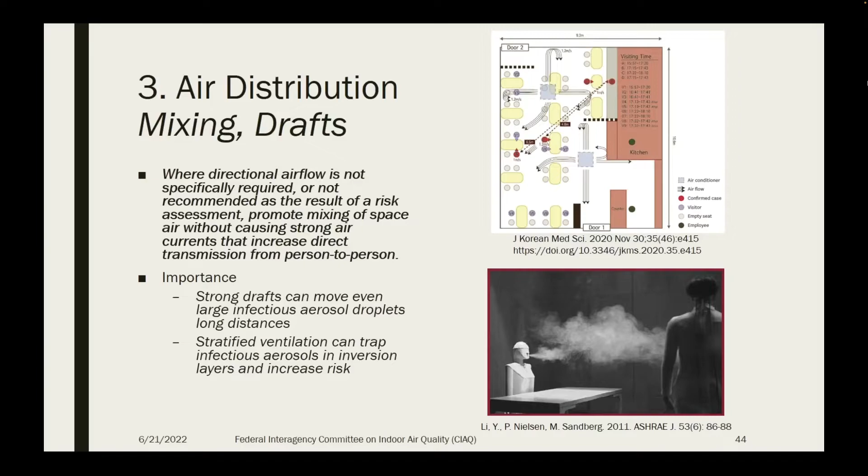ASHRAE's guidance also touches on humidity and temperature, and the recommendation is maintain temperature and humidity design set points. Why do we think that? Well, there's a limited ability to adjust occupied temperature set points, and if you look at the data on response of SARS-CoV-2 to temperature changes that DHS published, we're making spaces pretty uncomfortable in the interest of somewhat reducing the active lifespan of SARS-CoV-2.

So we don't feel that that's something that should be done. As far as humidity is concerned, yes, it also has a significant effect on the rate of inactivation, but it appears to be lower than the effect of other controls.

The figure on the right is from some research in influenza from Linsey Marr from several years ago. And we see in the lower circle here that inactivation is affected by relative humidity between 10 and 90%, varies quite a bit. But when we combine that with even 1 air change per hour of ventilation and expected settling, we don't have a very significant effect in terms of overall removal. And if we increase the ventilation to 10 air changes per hour, we can hardly see the difference here that's

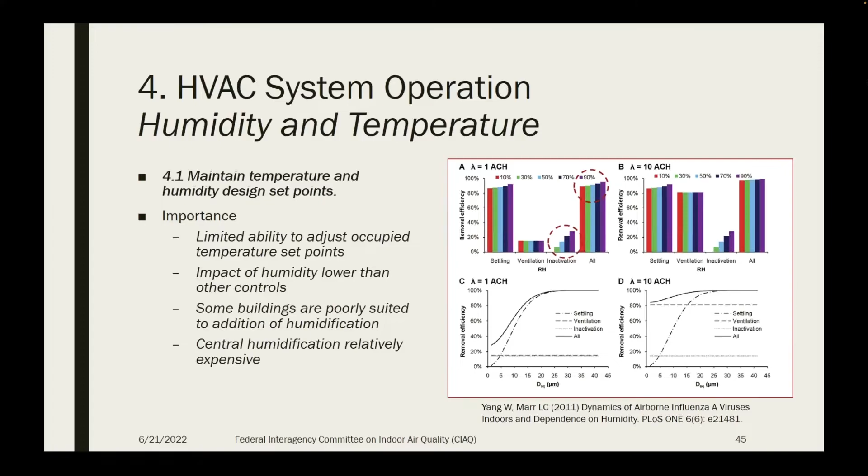associated with humidity. So in addition to that, there's the concern that some buildings cannot handle the levels of humidity that have been recommended, 40% or higher, without developing other problems, condensation and mold growth. And these systems can be expensive in commercial buildings. So we didn't recommend it as a prioritized COVID risk mitigation measure, but it's still not a bad thing.

And we go back to the ASHRAE handbook and to guidance that's been there since the 1980s. For a long time, ASHRAE has recommended 30 to 60% relative humidity, and the original work that supported that recommendation by Arundel and Sterling actually recommended 40 to 60. So this is not a bad idea, and I'll say that I've humidified my house for more than 20 years, and I'm glad I did for a number of reasons.

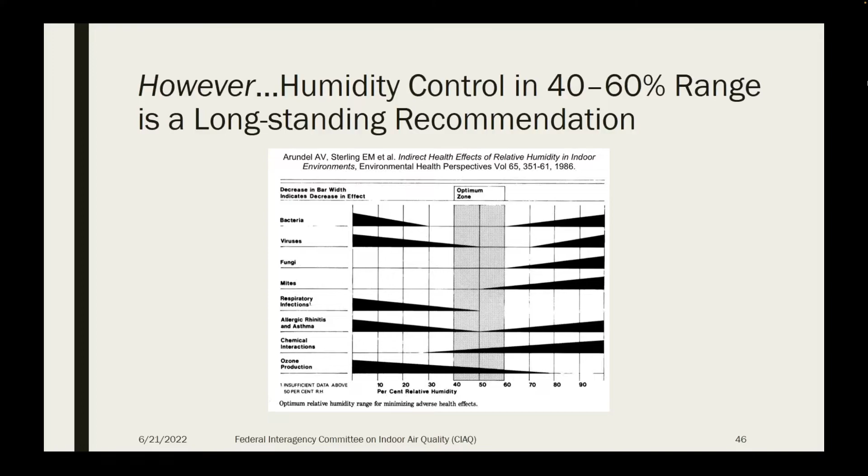So those are some of the basic technology changes. We also have recommendations that relate to how we operate systems during the pandemic. And the first was to maintain the design ventilation rate during occupied periods. And again, this comes out of an abundance of caution that when you don't really know how much outdoor air is required to reduce risk to a reasonable or acceptable level, then reducing it at all becomes a questionable act.

So the reason for this recommendation was in part to discourage the use of conventional demand control for energy savings during periods of high risk, and also to encourage running systems no matter who is there, not just the normal daytime occupants, but also the maintenance staff. A third reason for making this recommendation was that early on, many were saying run systems 24/7, and that clearly doesn't seem to be necessary when you look at how long it takes to clear a building of contaminants by various means.

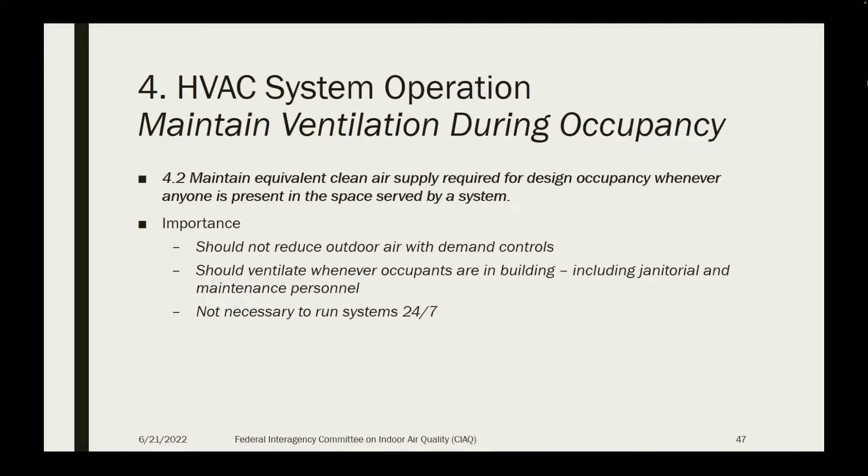And so that leads to the recommendation with regard to flushing between occupancies. The final form of this is that when we need to flush spaces between occupied periods, operate systems for a time required to achieve 3 air changes of equivalent clean air supply. We can imagine cases in which you might have a group in a conference room, and another group wants to use it, or they're switching classes using the same classroom in a school, and being cautious, we don't want residual infectious aerosol from one group to cause infections in other groups, which has happened. So we need to allow some amount of time to clear the air.

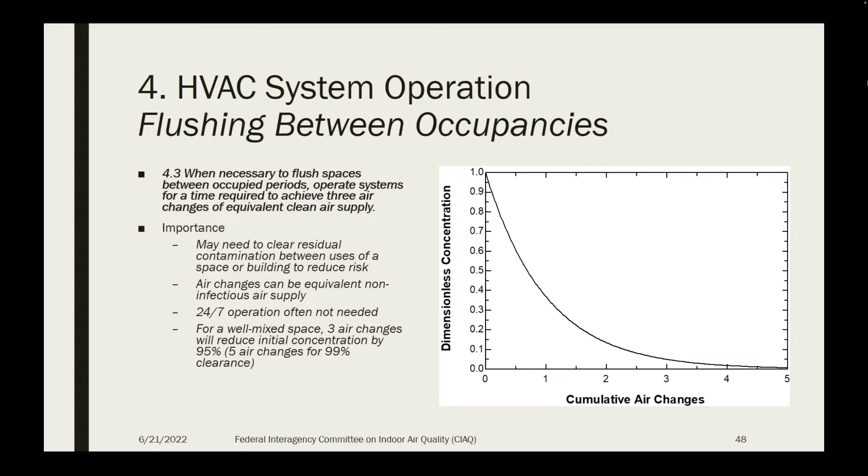And if we have a space where the mixing of the supply air is good with the room air, then 3 air changes is enough time to remove 95% of the initial contamination. And so again, this is to clarify that you don't need to run systems 24/7. And in fact, running the system at the very beginning of the day and the very end of the day may not be necessary at all if there's a long overnight period during which aerosol will settle out or circulation through filters will remove it. And this illustrates, I think, the evolution of the guidance to try to make it as energy efficient and affordable as possible.

So the importance for users of the guidance is that evaluating energy recovery devices usually leads to the conclusion that you can continue to use them. And ASHRAE has produced a long document about how owners can do that.

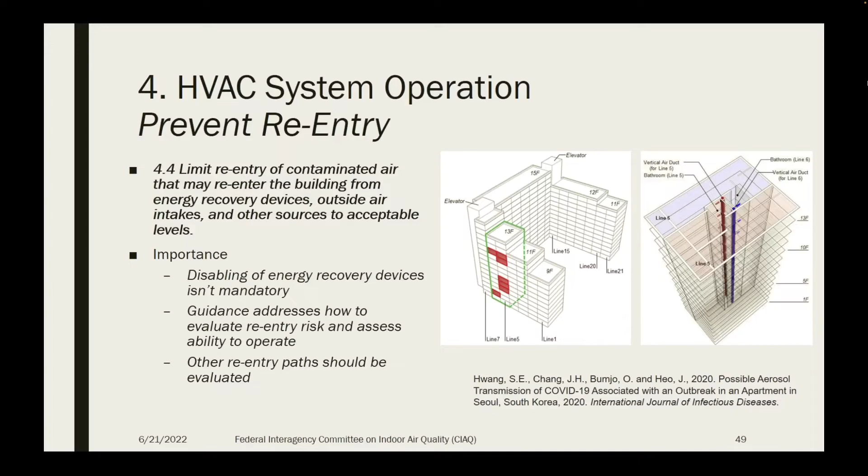There are other reentry paths that should be evaluated as well. This is just a general caution and maybe not the most important thing we're dealing with at this point in the pandemic. And then the final recommendation is that systems be commissioned, verify that HVAC systems are functioning as designed.

That seems like a pretty low aspiration, but it turns out that it would be really a big improvement if every building was at least meeting the code that it was designed for. We know that many existing systems are poorly maintained and not functioning well.

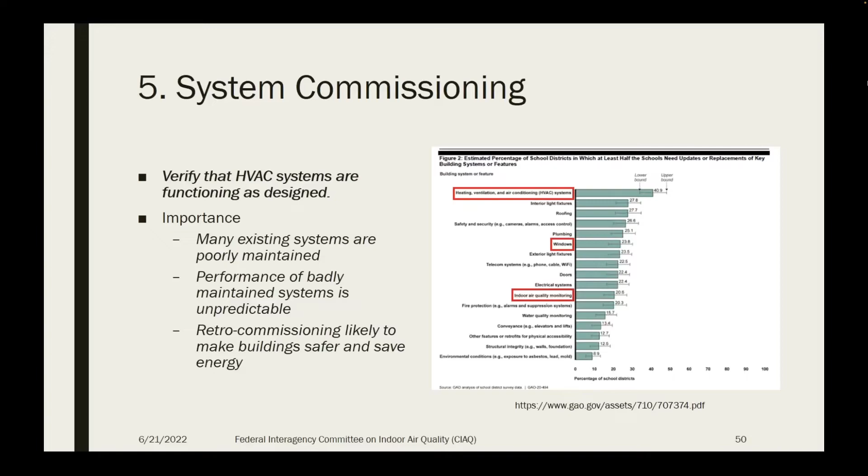Again, before the pandemic, a study was done by GAO on schools that found that HVAC systems were the #1 maintenance item. 41% of school districts had 50% or more of their HVAC systems that needed to be repaired or replaced. It's hard to determine how well a system is going to protect you if you don't really know how it's working. So I think this is a big issue for the future, is maintaining the performance of systems.

So now let's turn from those recommendations of the Epidemic Task Force to how that blends with existing standards and with what we know about air quality generally. And I would say that we've certainly had evidence that there's a health and productivity deficit that has existed for decades. William Fisk at LBNL was publishing articles and reports 30 years ago that indicated that it was costing the U.S. hundreds of billions of dollars per year in lost productivity and in increased healthcare costs.

We've found plenty of evidence that buildings are not maybe the main cause of risk during the pandemic, but they're certainly a significant one, and that's partly due to poor maintenance. And we've also found in trying to develop guidance that the retrofit options were quite limited in many cases, and so it's been a heyday for portable air cleaner makers because the only way to upgrade a lot of buildings is to plug things in.

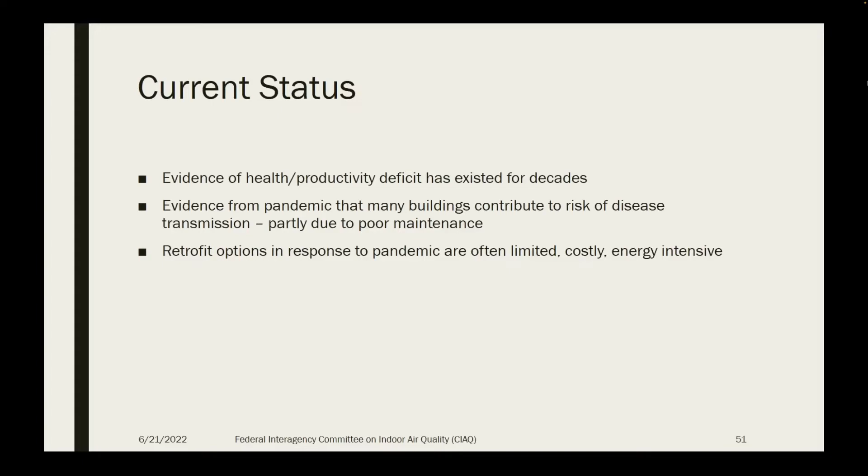So what sort of future developments might there be in 62.1 and other standards? These are just my ideas on that. I think that clearly if we're going to have a standard that promotes health and well-being and the contemporary understanding of those terms, that we need to update the scope and definition of acceptable IAQ in a standard like 62.1, and that may be the hardest thing to do.

Some prescriptive changes that might be made is to look at the way in which ventilation rates are determined and do it on a risk and cost benefit basis, somewhat like the way energy standards are being done. I think we need to consider filtration for recirculated air, not just to protect equipment in systems.

And I think that prescriptive performance tiers might be one way to make it possible to define higher levels of performance than we have now. This is done in European standards. The GSA does it in P100. I think it's something worth considering for ASHRAE 62.

Moving towards performance-based controls, I think, is a good thing to do as well. Maybe we still have prescriptive ventilation rates, but perhaps overlaid with sensing for some key contaminants so that we really know what's going on. And PM2.5, PM10 might be among those, formaldehyde and perhaps some other VOCs, and possibly even carbon dioxide.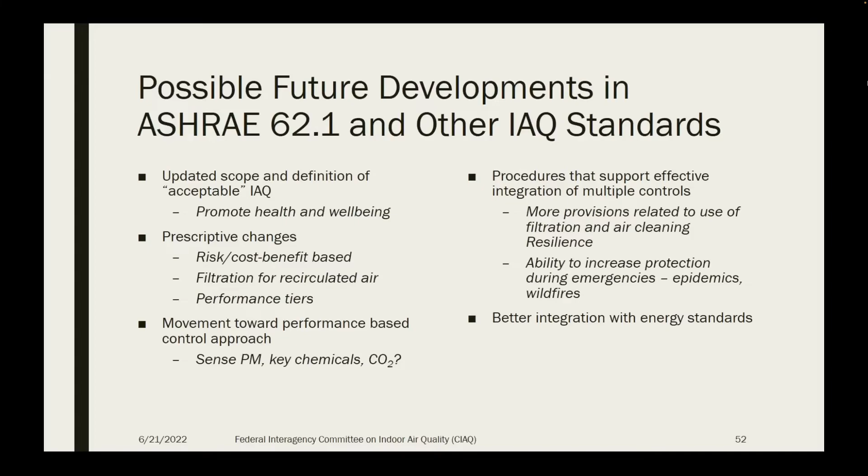So all those things would be great if we did them. That's version one of the future. The other is nothing happens, because there are a lot of barriers. The existing buildings are always a problem, and we do a good job of figuring out how we would do the next new building, but the solutions for the existing buildings are really the important ones.

We certainly know, if we pay attention to what the public says, that the scientific justification for better indoor air quality is not persuasive to everyone, and if they perceive that as a cost without a benefit, then there's going to be resistance, and that ties into the fact that the economic justification, although it's been done over and over, doesn't seem to be understood widely enough.

The problem of split incentives: who pays, who benefits? Somehow the costs and the benefits have to be shared, and there are many ways that we could do that, and that suggests perhaps the need for policy changes as well as standards changes, which many are averse to. I think it's time to think about a little regulation of indoor air that would really be beneficial to all of us.

Lack of standards and certification for air cleaners is a big problem. They're one of the best solutions we have, but we also can't specify them with confidence yet. Workforce education, from designers to technicians to building operators, I don't think there's a high enough level of understanding of human factors and of how indoor environment affects people. And I think we have a job to do there, but if we do it effectively, then it actually creates new industries and new opportunities for the economy to grow.

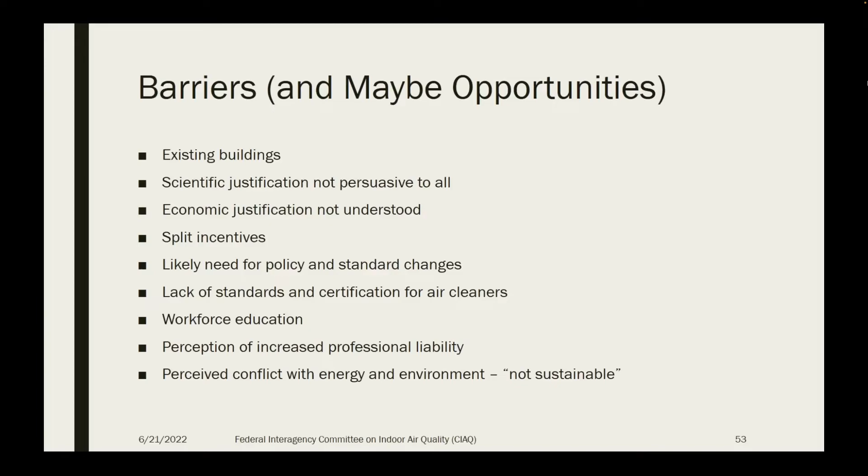Within the design community, there's certainly a perception of increased professional liability. There are several people who are probably listening who have been in the discussions about whether we can say the word health in standards for indoor air quality, or whether that's simply an invitation for litigation. And then finally, again, is this concern about energy and environment, about climate change and indoor air quality improvements not being sustainable.

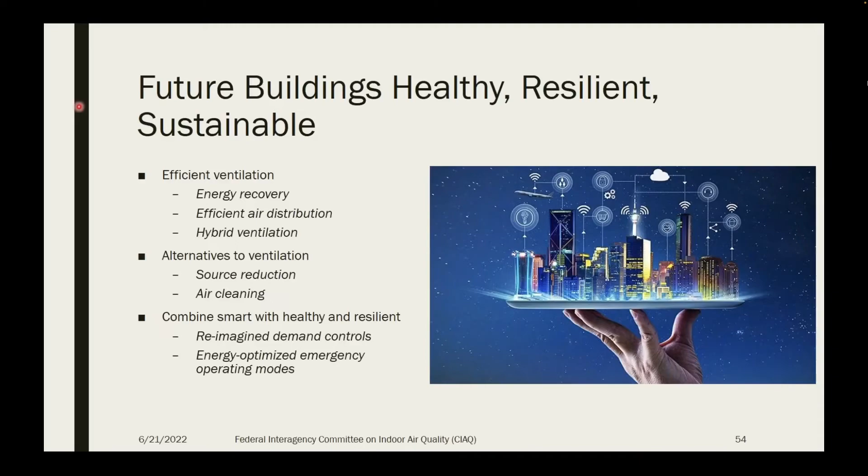I won't go through all of these items in detail, but I just want to say that I think there are a lot of technologies on the shelf that are well understood that we can use to have buildings that have better indoor environmental quality and that are also low energy. Some relate to ventilation, some relate to alternatives to ventilation like air cleaners, and also I think smart building technology has a role to play here, and a different approach to demand control ventilation that strives to maximize benefits to the occupants while minimizing energy and environmental impacts is something that we can start thinking about as technology develops.

And then final thoughts, my last slide. We've certainly learned that our built environment hasn't functioned as well as we'd like it to protect us during the COVID pandemic. Certainly, people have played a big part in that too and how they behave, but buildings have some shortcomings that are now well understood. We also have older IAQ issues that have been waiting to be addressed, and I think now is the time to work on those as well as on making buildings safer when there's another epidemic.

Adaptability of buildings is going to be a key to making this work. So I go back to my comments about resilience and the need to think about different concepts of control of systems. We don't always want to operate a school like a hospital, but maybe there are times when we'd like to approach that level of protection if it allows us to continue operating.

To make progress requires a broad coalition, public, private, and also commitment and cooperation over a period of time. Even if I had all the right answers written down today, it would take years to implement them, and I encourage everyone who thinks this is something that needs to be done to buckle up, because it's going to take years to make significant changes of the type that we'd like to see happen.

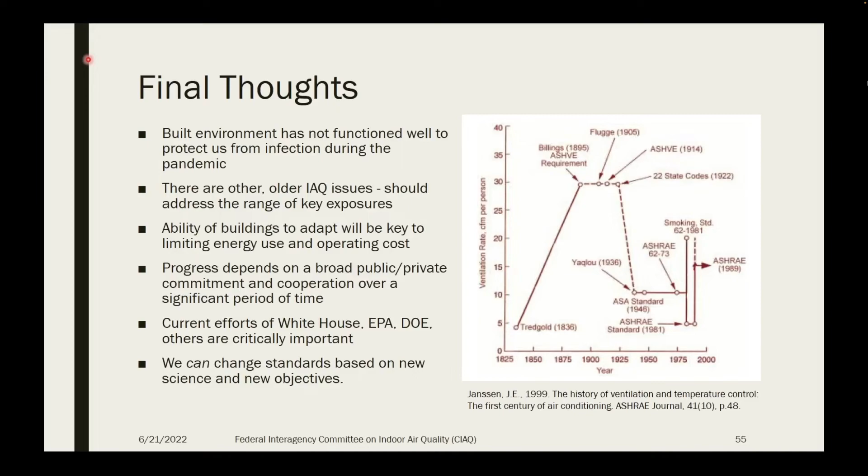I think that what the White House, EPA, DOE, and others have been doing in recent times is really important, and I commend them for that. And I want to say it's essential to the program that we're trying to embark on. I think we can change standards, we can change practice if we focus on what science tells us and if we set some higher objectives than we've had in the past.